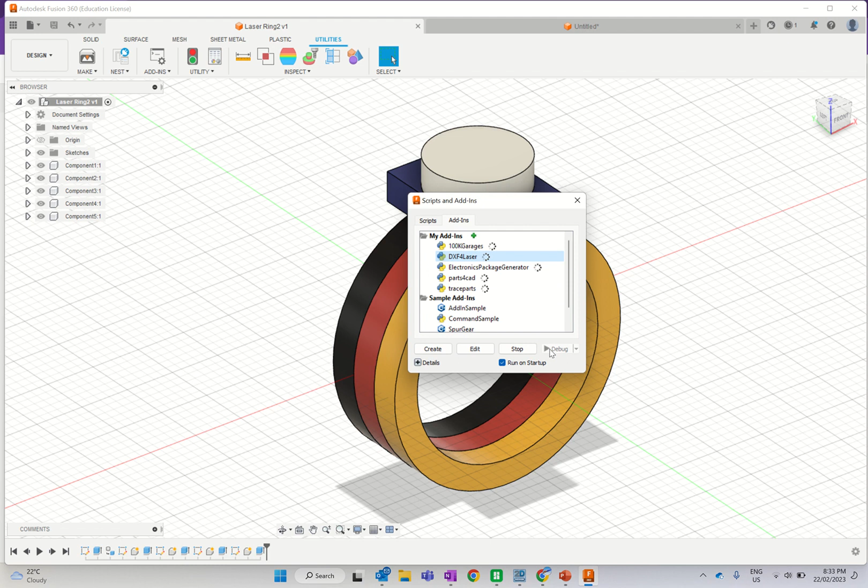You go to add-ins, and then what you'll do is you'll find DXF4Laser here. You select it, and then you actually go Run - I think it'll have run here for you to do it. Yep, so run like that. You just select on it and press run, and it will be ready to use.

So how do we use it? Well, we come back to the Solid tab, and anything that we want laser cut, we're going to hide everything else, every other component, except for the one that we want laser cut.

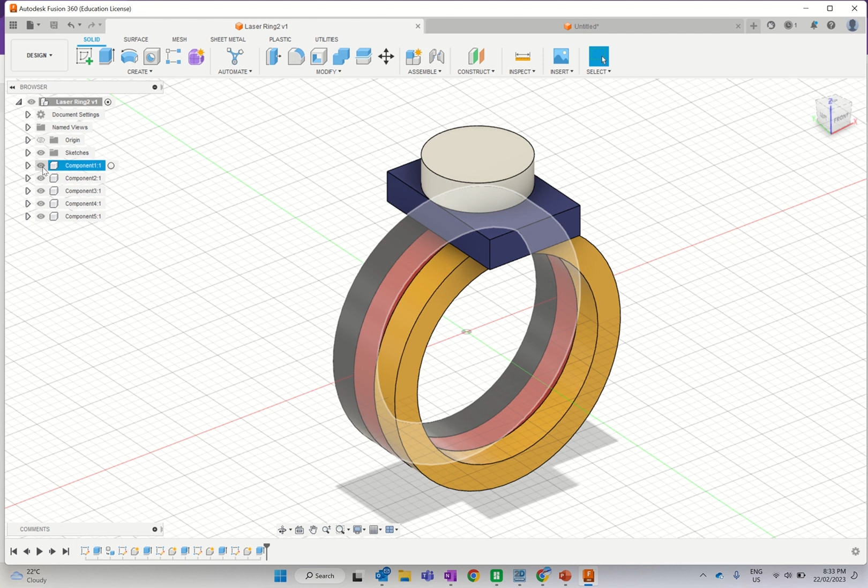So let's say, for instance, I'm going to get rid of this one. All I have to do on the feature library over here - you can actually see I've got an eye. I'm going to select the eye, and now it's disappeared. It hasn't gone anywhere, I've just hidden it. So I'm going to hide here, here, and here, and this is the one that I want to laser cut.

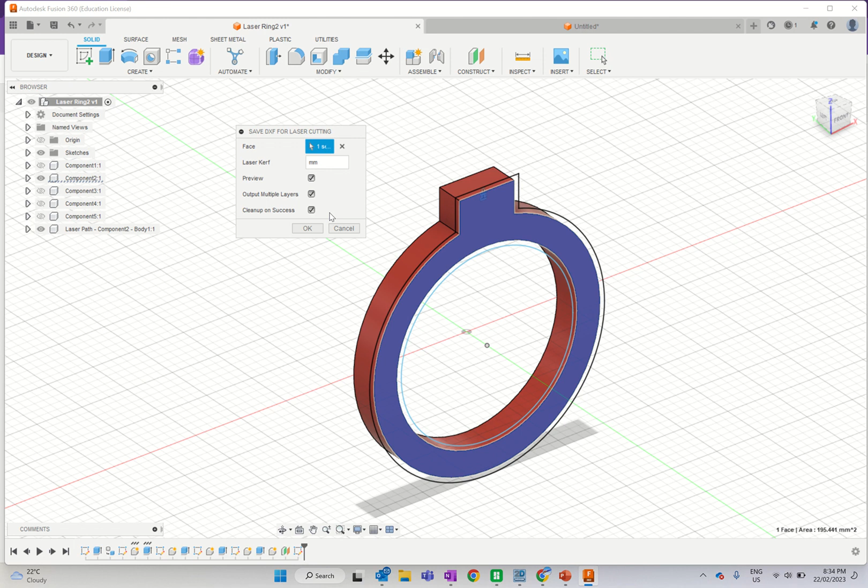To get the DXF, I go Create, Save for Laser Cut, select over the top, and it's got a kerf here - we don't want a kerf at all, so we're just going to get rid of that completely. From there, it should give us the line around the outside that it's going to cut. And then we just go - let's see, okay, it's going to cancel that.

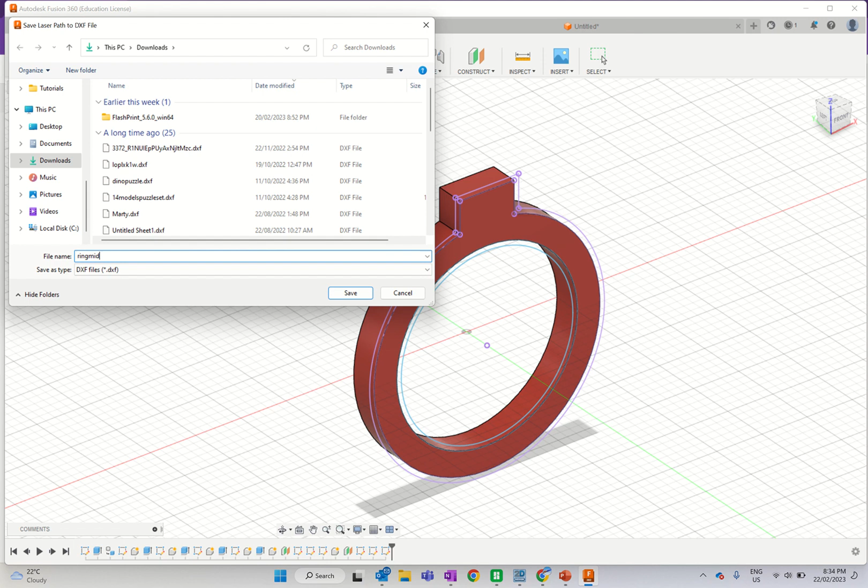Let's try that again. So, DXF for laser, I should be able to put in 0 millimeters there. Select the outside, and then okay, and then I can save it. So I could call this ring 1 or ring middle - you call them whatever you want - and obviously this is in Downloads, and save it. Now in my downloads it'll be called that.

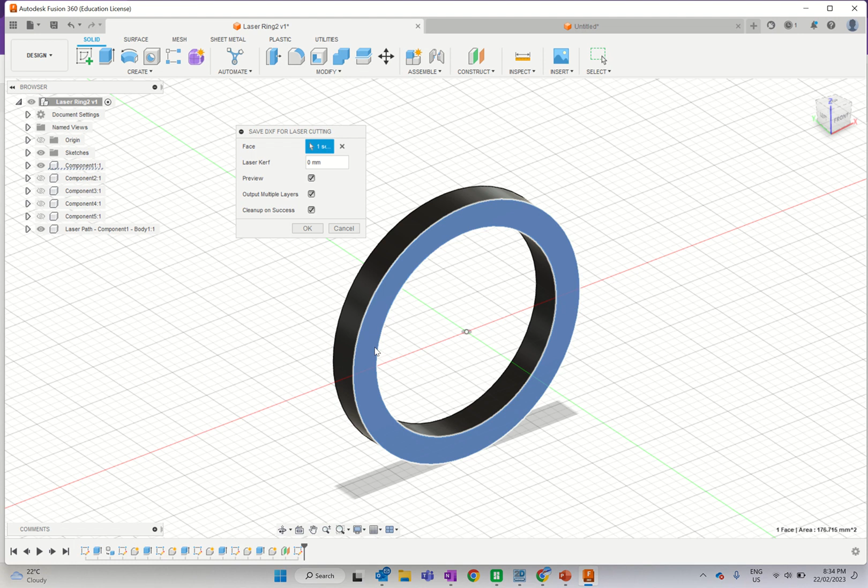Let's get this here - sorry, I'm just going to kill that and then move into the others. There we go, delete. Okay, next thing, let's turn that one off and turn this one on, and I'll do the same thing. So now I go down to Save DXF for laser, select over that profile that I want laser cut, and then OK, and I can call this ring side - that's a pretty lame name, that's okay.

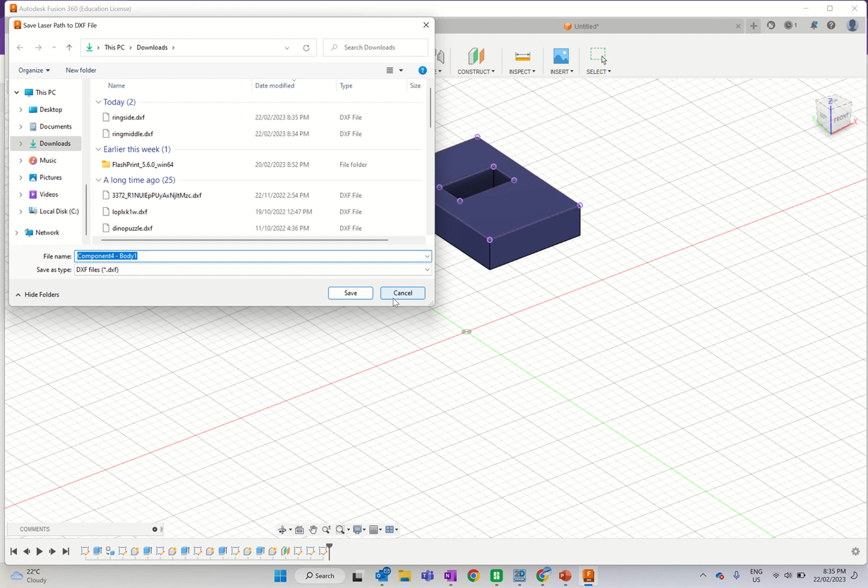And I unselect this and select this one. Well, I already have that, so it's exactly the same as this one here, so I don't have to do that one again. But I do need to do the top, which is here. So then I can select that, go down to laser cut, boom, okay, call that ring top, and then I've only got one more to go.

Once you've done all those, you can put them into the laser software and laser cut them out. So this one over here would be not too dissimilar to that, where you just have to hide the component that you want and then just do the same thing - DXF for laser cutting, select, okay - and yeah, just work through that.

And yeah, you should be able to save all those up and get them ready for laser cutting. Okay, that's the end of this tutorial. Hope that was somewhat helpful.